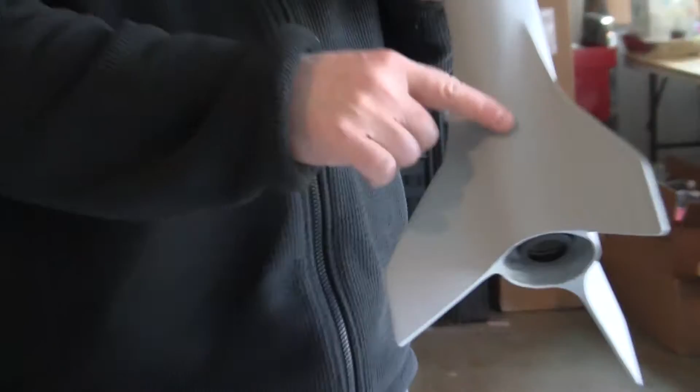a fully fiberglass kit, custom made by myself. The inside is a fiberglass tube, outside is a fiberglass tube. The only pieces that we're using from the kit is the actual plastic fins and the nose cone. But in the case of the plastic fins, we've done a full fiberglass tip to tip with heavy epoxy, and you can see there's no seams, and you can see how the ends are rounded.

But I'll use this rocket to demonstrate some other modifications we're going to make to the kit. So starting out, when you get the kit, some supplies that I recommend to make it easy.

First of all, the adhesive that you're going to use on the kit. For everything on the kit, with the exception of the engine retention ring, you need to use a 5-minute up to 30-minute epoxy. I recommend 5 minutes because most everything, once you set it up, you want it to dry pretty quick. This is Loctite epoxy. You need to use an epoxy that has a hardener and a resin, because the strength of those epoxies are what you need for the kind of stresses the rocket goes through. Loctite can be found in Lowe's and other stores, but if you have any other name brand that you like, preferably 5-minute, make sure it's a mixable epoxy.

As far as the engine retention ring, we use JB Weld because it's at the point of the nozzle in the engine, so it does get hot. So we use JB Weld to make that attachment there. Another thing, I use wood filler glue from Elmer's. It's kind of a pasty appearance. I use this to fill in any cracks or any gaps during the painting process, and also the pre-assembly, which I'll explain shortly. Works very well, dries pretty quick, and you can sand it.

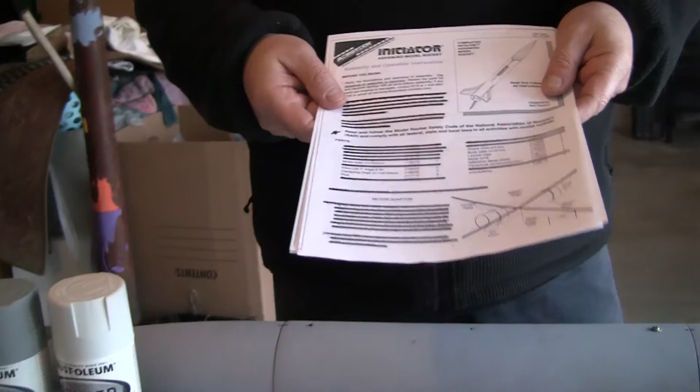So there are some pieces to the kit that you want to eliminate. When you open up the kit, you're going to have this mesh, and there's a plastic baffle that's listed up here in the parts list.

I've tried to use that before, but it tends to absorb too much of the ejection charge, and a couple of times the parachute doesn't come out. So you eliminate this and the plastic baffle.

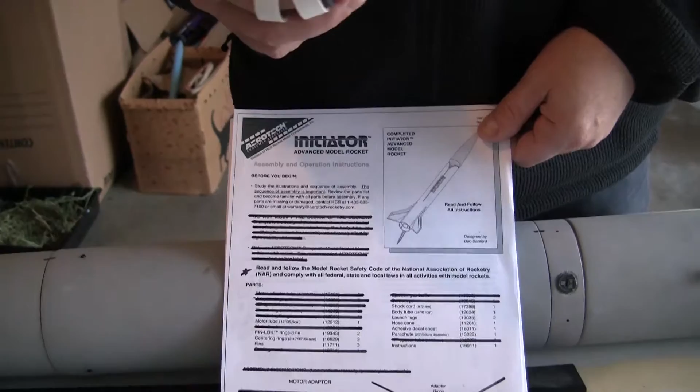We're also going to make this engine tube accept a CTI engine. All the first steps talk about putting things inside the motor tube to adapt to AeroTech's engines, but we don't want any of those, so a lot of the first instructions have been deleted. Those parts you just won't use, and the main one is the engine hook, which is explained throughout the instructions. We've deleted that.

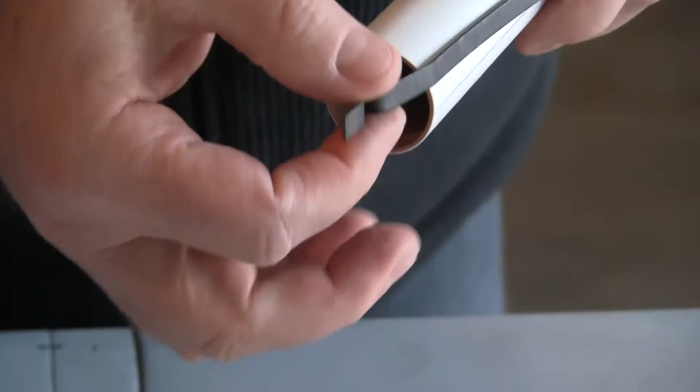In the kit you have your engine tube, and per the instructions it goes here and clips the end of the engine, but the kind of engines we're using don't need this, so we're going to get rid of it and use the AeroPack instead. This one's actually too big, but it's the only one I had. The AeroPack glues onto the end of the tube and holds the engine in, replacing this pin here.

The other thing you'll get in your package is what we call the parachute protector. It's basically a fire retardant material, and we're going to put that on the parachute where it connects to the ejection cord. This will substitute for wadding and protect your parachute, and I'll show in a later video how to put that on.

The other unique pieces are the CTI engine casing. This is a 3-grain engine casing, so all your engines will go into this, and it can hold up to 3 grains. This is the retention ring at the back, and you'll get this in the kit.

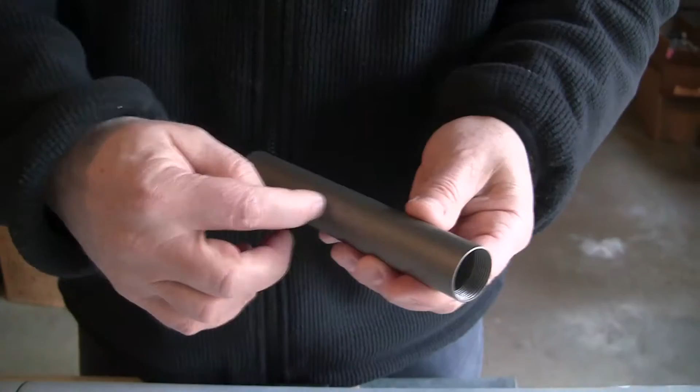You have 2 spacers. If you're running a 3-grain, you wouldn't use any spacers. If you're running a 2-grain, you'd put 1 spacer in. If you're running a single grain, you'd put both in. The idea is you want the engine to butt up to a hard surface when you put it in, then you'd screw this on. I'll go into more detail on an engine load later.

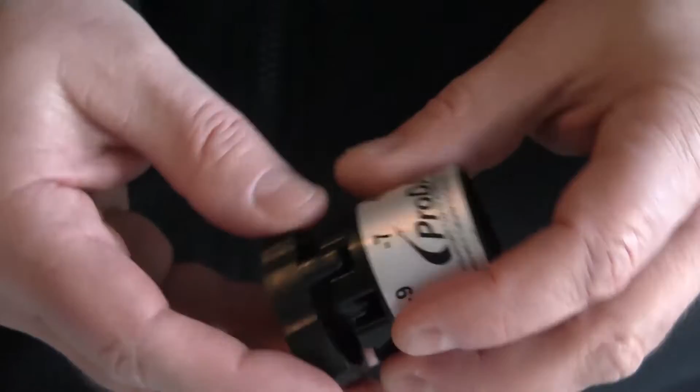What comes with the kit is the ejection delay that you use to drill out part of the delay burn — this determines how many seconds you're reducing from the ejection. I'll definitely go over that.

This is an engine casing with the igniter taped to the outside. This is a White Thunder, the lowest, smallest CTI engine you can use on this kit and still meet the thrust to weight ratio. I'll do a demonstration while I set this up, but you'll be getting 2 of these. This will put the rocket up about 700 feet, so this will be your first engine use — I'll go into greater detail on how to do that.

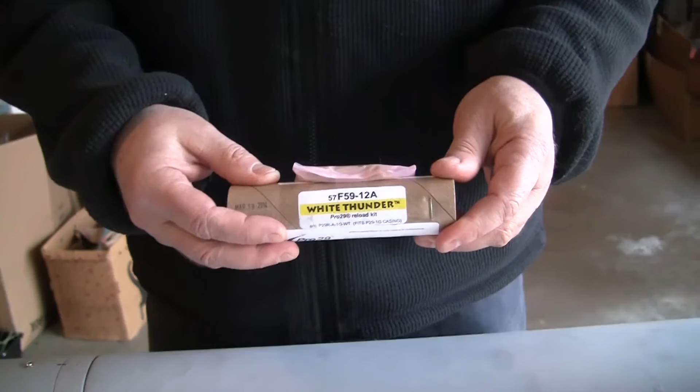Okay, so now I'll go over details on the actual construction of the rocket.

Before we start construction, it's a good idea to keep the box. The box has some perforated areas on the back, and the idea is that when you assemble it, it serves as a kind of test stand where you can sit the rocket on and do maintenance or load engines. It's nice to have this out in the field set up so it could act as a rocket mount — even some smaller rockets can sit on this, so it's a good thing to have in the field to hold it up.

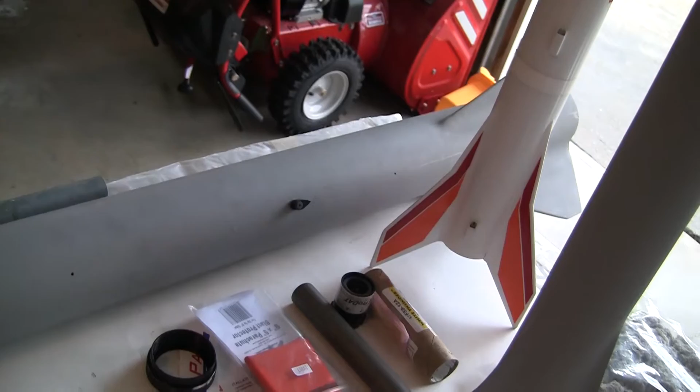Step one in my process, which isn't highlighted in the instructions: when you open it up, you'll have the outside exterior tube, the engine tube, the fins, and the nose cone section. Take all four sets of pieces and, with 60 to 80 grit sandpaper, sand everything. With the tubes, you want to get rid of the glossy feel and just rough it up so the adhesive sticks better. Same with the fins and nose cone — rough it up so the primer, paint, and glue stick well. So that's step one: take everything out and sand it.

Step two: take just the engine body tube and get some wood filler. Put the wood filler paste in a paper cup, add water to the amount in the cup, and you may need to add more paste — keep adding paste and water until you get almost a mayonnaise to ketchup viscosity. You want it more liquid than how it comes in the can currently. Let's see if I can get this open.

So you can see here it's kind of more of a paste, but you want to get it where ultimately you could brush it on with a brush. If you've got an old smaller brush, this is water soluble, so it comes out of the brush pretty well. The idea is on these seams, you want to brush over a pretty big area.

I brush on almost a half inch all the way around this tube on the seam. The idea is you want to get the wood filler into this crack. In this case, this tube is actually pretty good, the crack is not that bad. Some of them I've seen the crack can be almost up to 1/8 of an inch, but the idea is you want to brush on a fair amount. It should be a noticeable bump of putty on there as you brush it on and go all the way around.

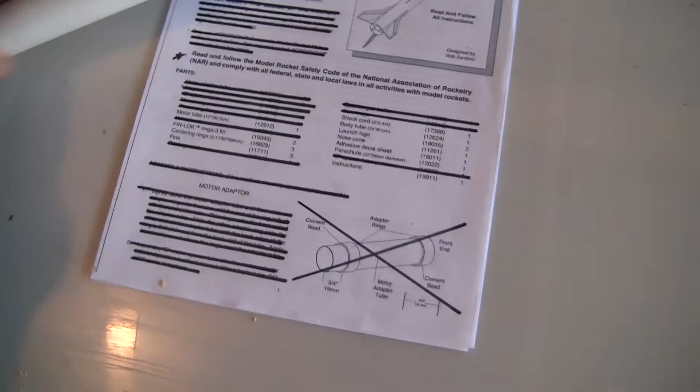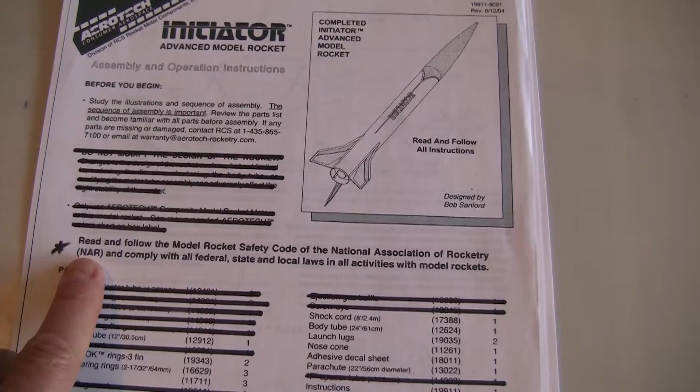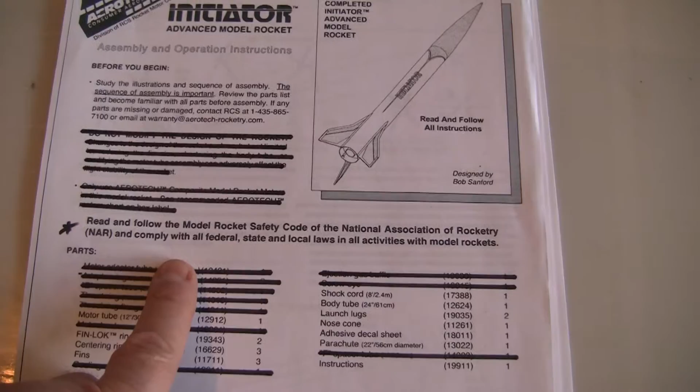So starting with the instructions, basically I've marked out all that doesn't apply. I do highly recommend this - the National Association of Rocketry is what I'm a member of. It's a great website, I would read that, although you don't have to be level 1 certified. You will be shooting engines that are well within the limit of what's considered NAR restriction for anything over level 1. But the precautions and procedures they use I highly recommend for the safety of people who are around you shooting it. So pull that up and read that if you would, please.

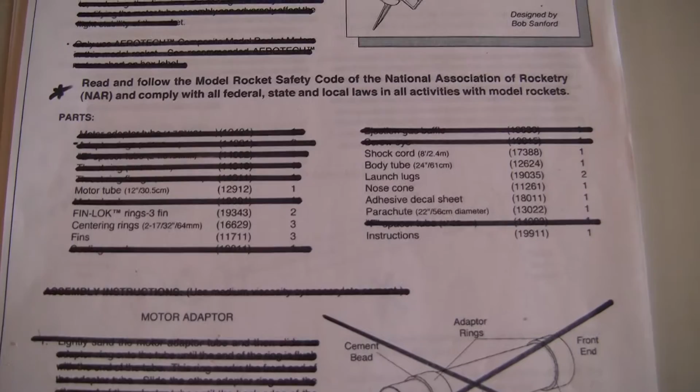So the parts - I've marked out most of all the components that are basically to go inside the engine tube that we're not going to use, and some of the hardware that we don't use on this kit.

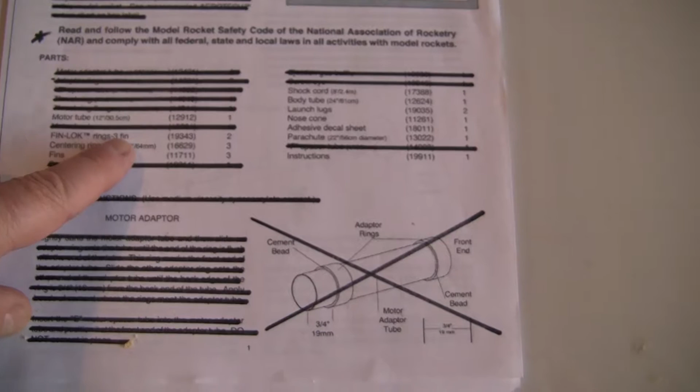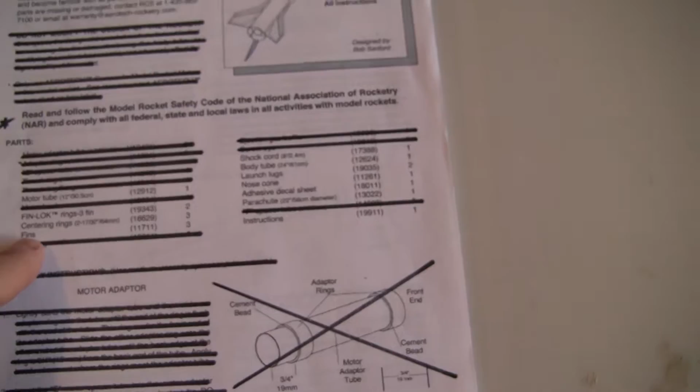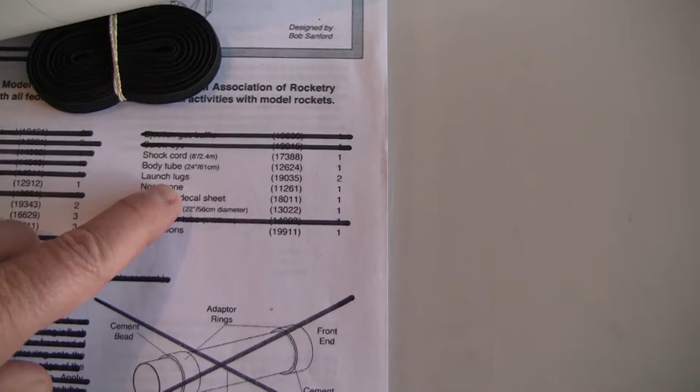Really the main pieces from the kit that you're going to use is the motor tube, that's here, the FIN-LOK rings - two FIN-LOK rings, the plastic pieces, you'll see those. You'll have three centering rings, the fins obviously, the shock cord we'll use, the body tube which I've already discussed, the launch lugs, the nose cone, the decal sheet, and the parachute.

Now the launch lugs - my original kit had these on it, you can see them. So once you glue them on and paint them, they kind of go around. That holds a 1/4 inch rod. So yes, you will use the launch lug, and please note the tapered end goes facing upwards towards the nose cone.

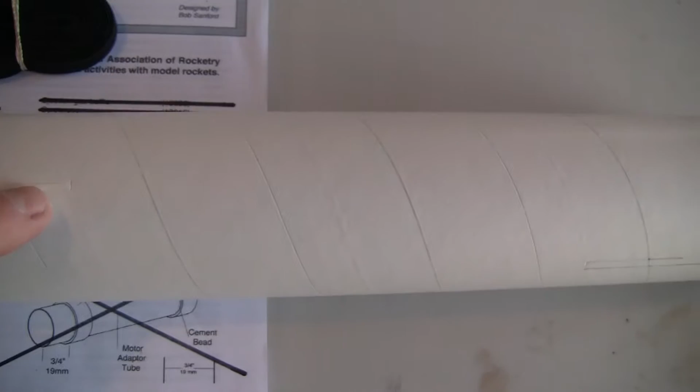The body tube is already perforated or punched out where these go. So when you take this out for the fins, you might go ahead and punch these out as well. There's one here and there's one here on the body tube, so I would go ahead and punch those out, also file and clean those up, and do that before you do the putty. That way you won't get the putty anywhere near that. So sorry about missing that step.

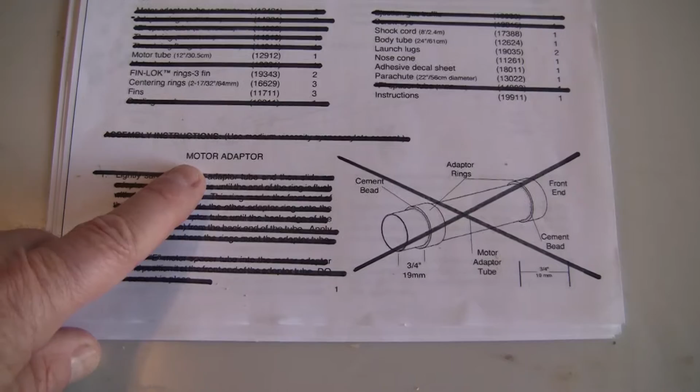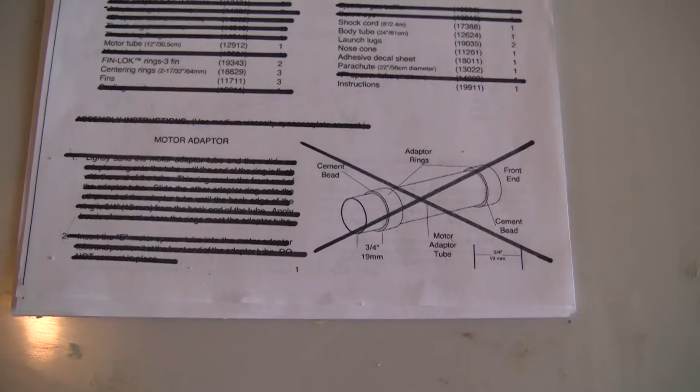So let's start the assembly process. The motor adapter section on the first page we're not doing - that's for other manufacturer engines and engines that don't use the CTI engine casing. So you'll have an actual cardboard tube in the kit with 2 smaller rings. We're not using any of that, so disregard that.

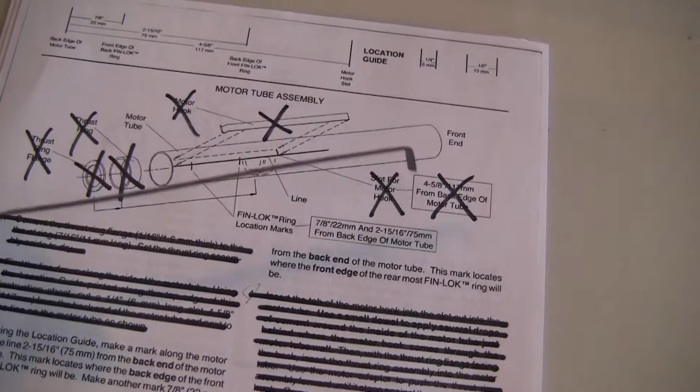Moving on to page 2, again the initial assemblies talk about putting the engine hook, which we're not going to do. So I have marked out all the pieces that we're not doing.

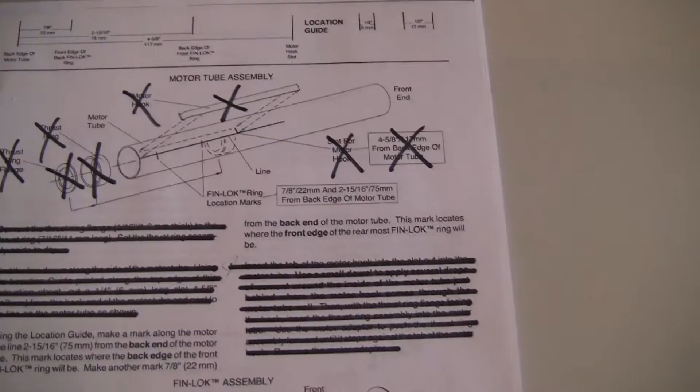Basically, do not attach the engine hook to this engine tube, nor put anything inside the tube. We want the tube completely clear of any obstructions. If you follow the directions, they'll have you gluing a donut ring inside, and if you glue that in, you cannot put the CTI engine in.

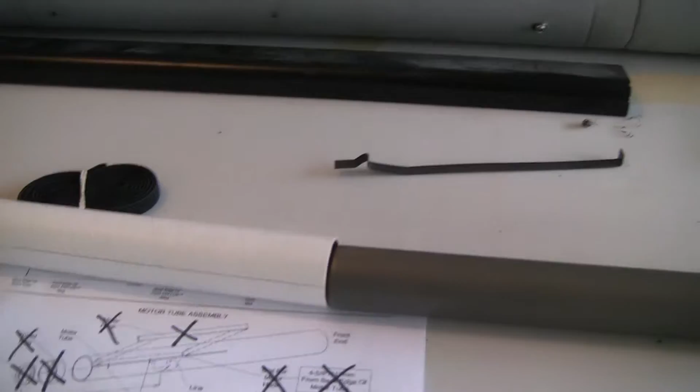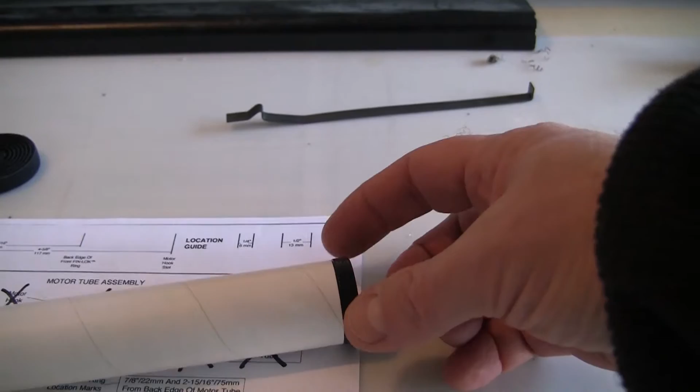So what I have here is the engine, the motor tube, and this is the CTI casing, and you can see how the flange here is bigger. That's what holds it in. That's why we don't need to glue all these pieces in per the kit, because you push this in, assuming this is in the rocket, you can see that bottoms out. This flange hits the end of the motor, and that's the connection point that basically takes the thrust from the engine casing into the rocket itself.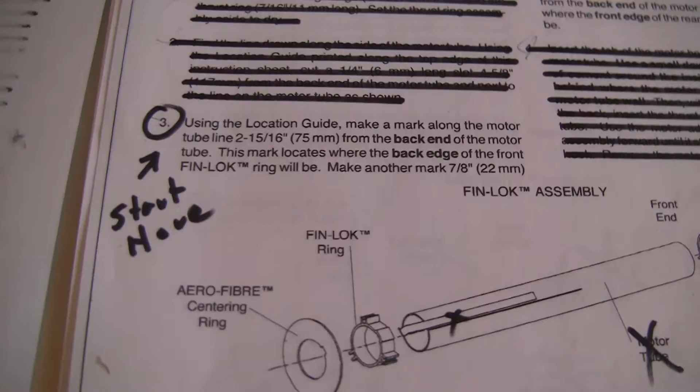So assuming you've done the sanding and you've done the putty on the body tube, the first step from the instructions that you begin to follow is under the section motor tube assembly on page 2, and you start with number 3, and I actually put an arrow.

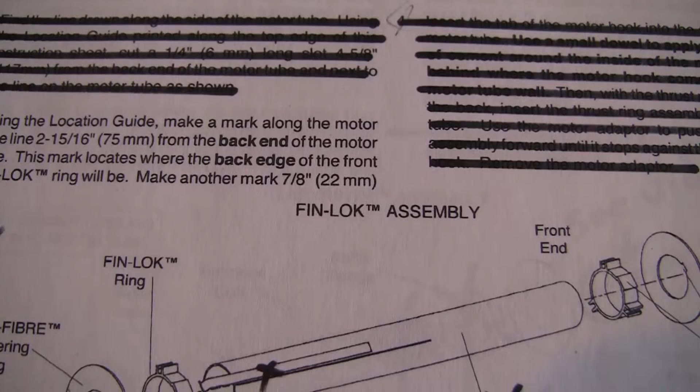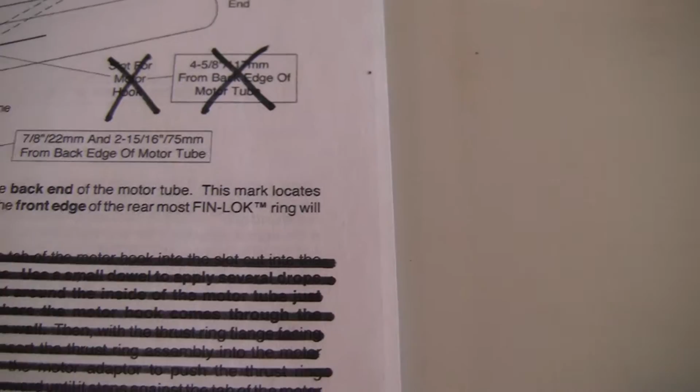Basically what it's saying is use the location guide, make a mark along the motor tube line at 2 15/16 from the back end of the motor tube. This mark locates where the back edge of the front FIN-LOK ring will be. Make another mark 7/8 inch from the back end of the motor tube. This mark locates where the front edge of the rearmost FIN-LOK will go. So making these marks is important, so I'll show you how to do that.

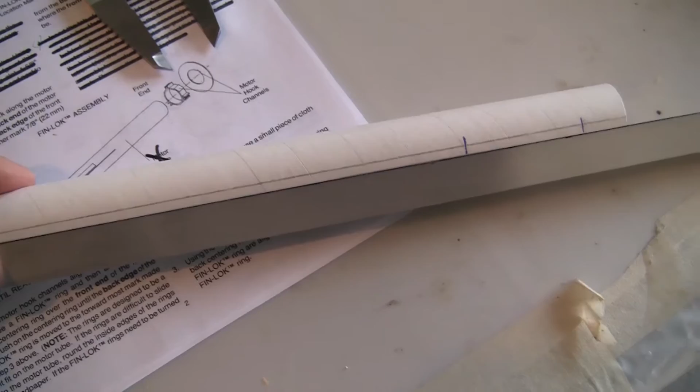Okay, when you get the tube for step 3, if there's not a line already on there, what I do is I use like a corner channel or something, like on this aluminum stock I've got here. It's a right angle aluminum stock, and basically I put the motor tube in there, and then I just draw a line down the length of the motor tube.

So I have my line here, and then you can either use the guide that they're talking about up here. You can line up the back end of the tube here on the guide, and you can make your marks. I would caution, because my prints have been scanned, so the scale is not quite right.

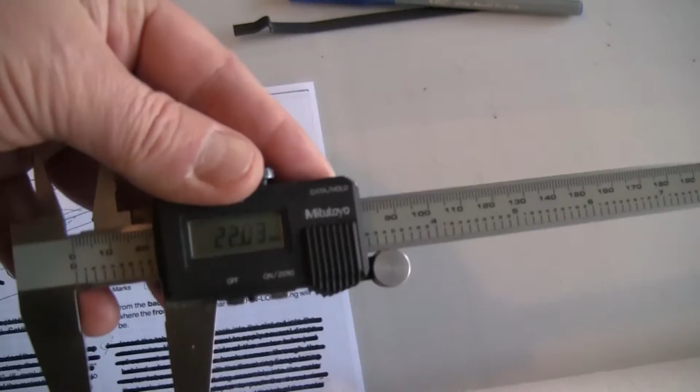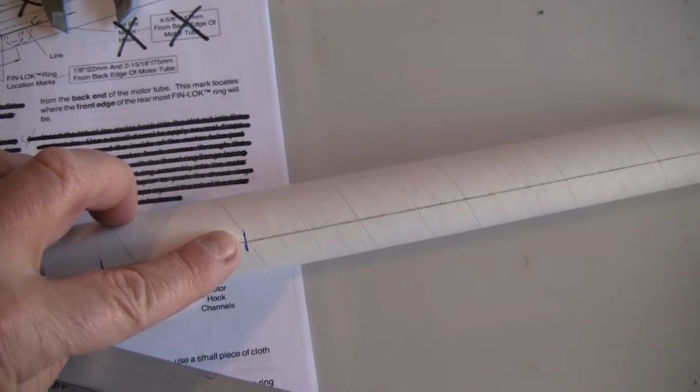But I use a pair of calipers, doesn't matter. Case in point, the first one is 22 millimeters from the back end, which I made the mark, and then you make another mark at 75 millimeters, or 2 inches and 15/16. So that's step 3.

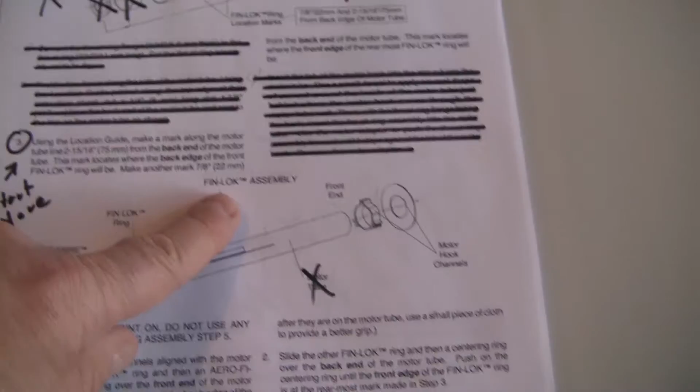Then we go to step 1 under the FIN-LOK assembly, and it's key here, as I say, for the next steps all the way to step 5, do not use any adhesive. So this is all just pressure fitted. You want to get everything fitted and aligned before you start adding adhesive.

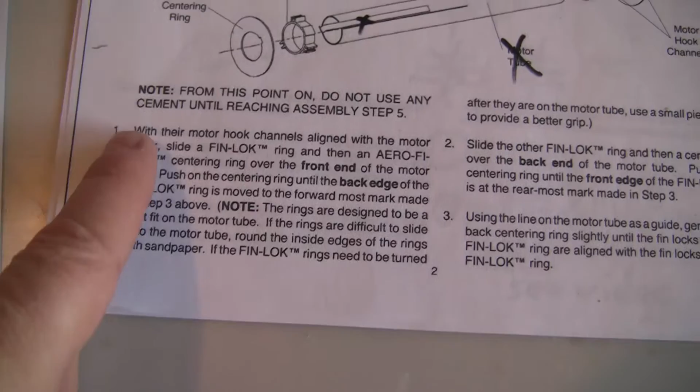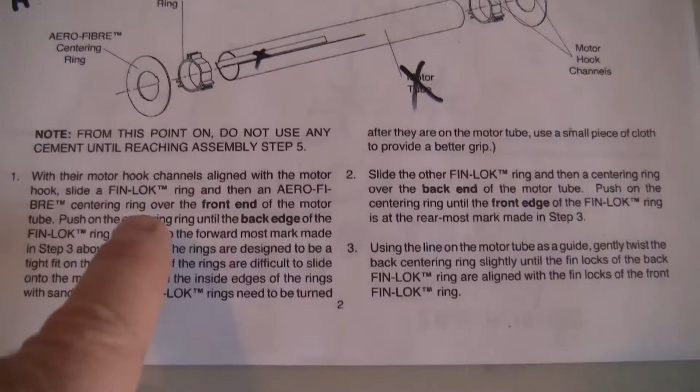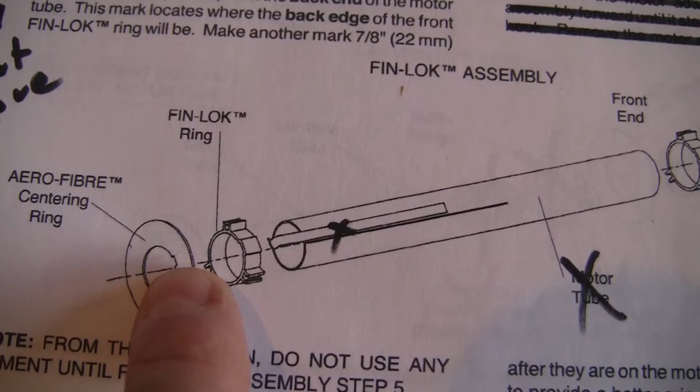So that's critical. First of all, step 1, with their motor hook channels aligned with the motor hook - in our case, we're not putting the hook on, so when they say the motor hook channel, I would just align that channel with the line that you drew on the tube. You'll notice the centering rings have a little cutout for the engine hook if you had it. The fin locks have a channel here, here, and here. Just make sure all of those line up with the line - one side lines up with the line you put on the tube.

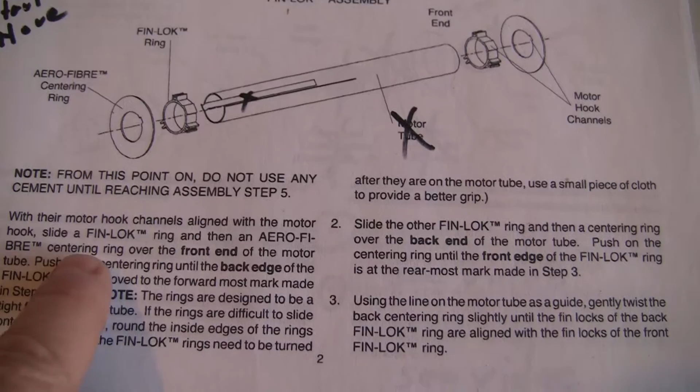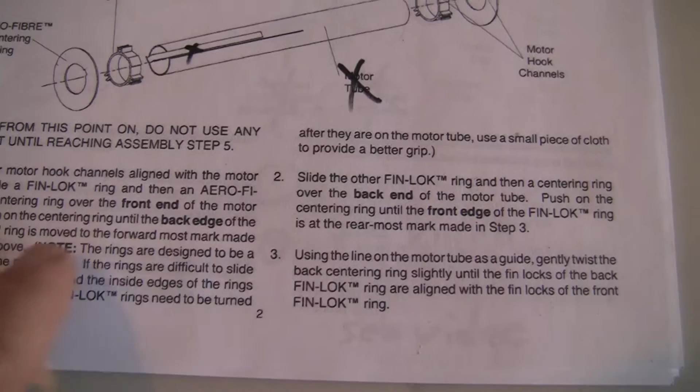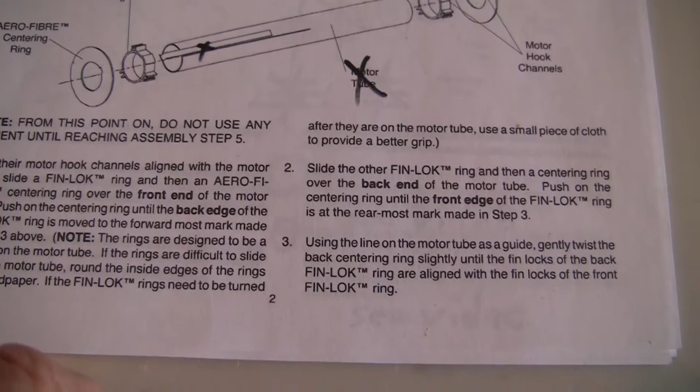So again, it says with their motor hook channels aligned with the motor hook, slide a FIN-LOK ring and then an AERO-FIBRE centering ring over the front end of the motor tube. Push on the centering until the back edge of the FIN-LOK ring is moved to the forwardmost mark made in step 3 above. Note, the rings are designed to be a tight fit on the motor tube. If the rings are difficult to slide onto the motor tube, round the inside edges of the rings with sandpaper. If the fin lock rings need to be turned after they are on the motor tube, use a small piece of cloth to provide a better grip.

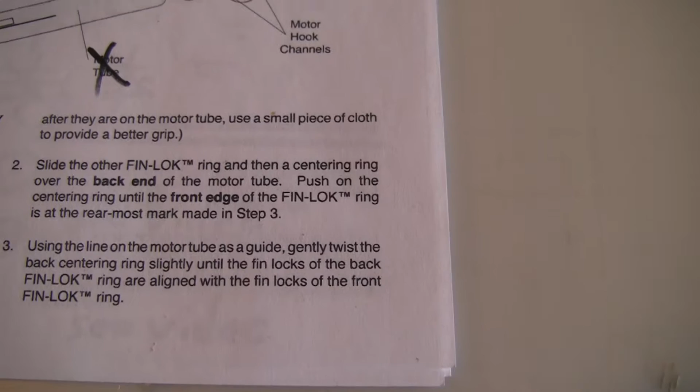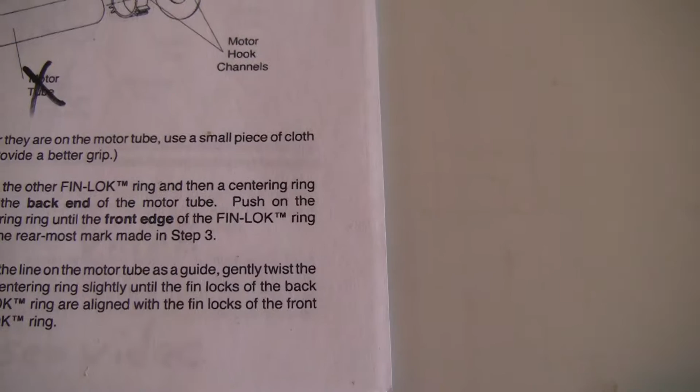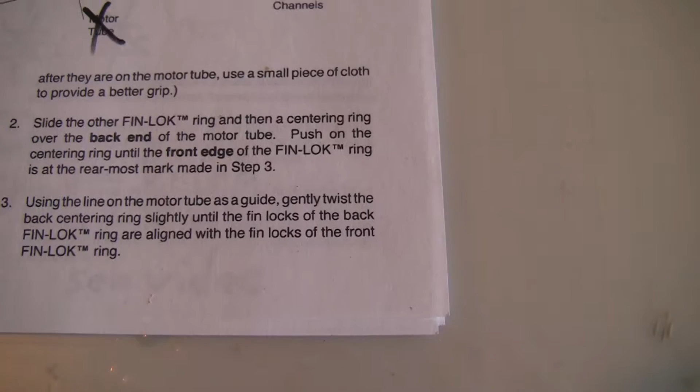Step 2, slide the other FIN-LOK ring and a centering ring over the back end of the motor tube. Push on the centering ring until the front edge is at the rearmost mark made in step 3. Using the line on the motor tube as a guide, gently twist the back centering ring slightly until the fin locks of the back fin lock ring are aligned with the fin locks of the front fin lock ring. So you end up with this configuration here.

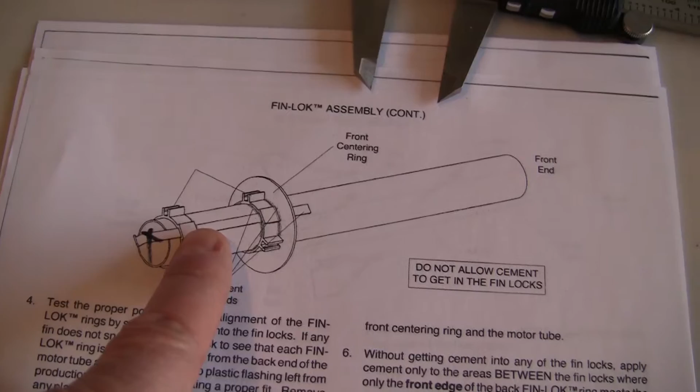You should see this fin lock lined up with the mark you made at 22 millimeters, and this fin lock lined up with the line you made at 75. You basically have the centering ring pushed flush up against the fin lock.

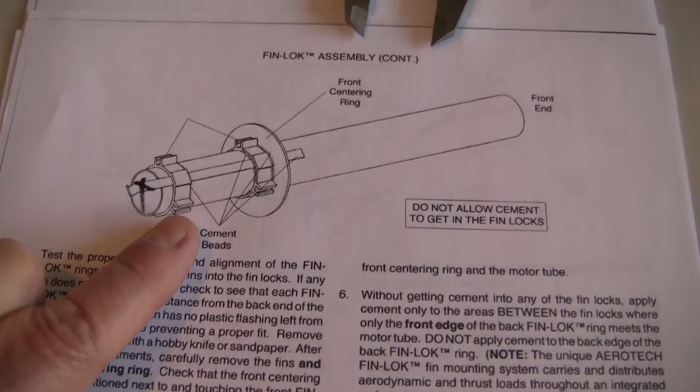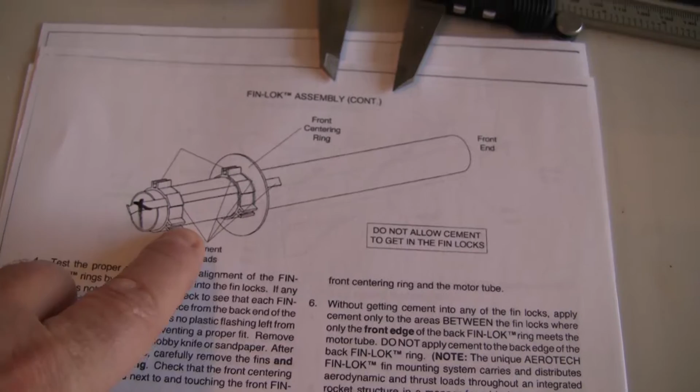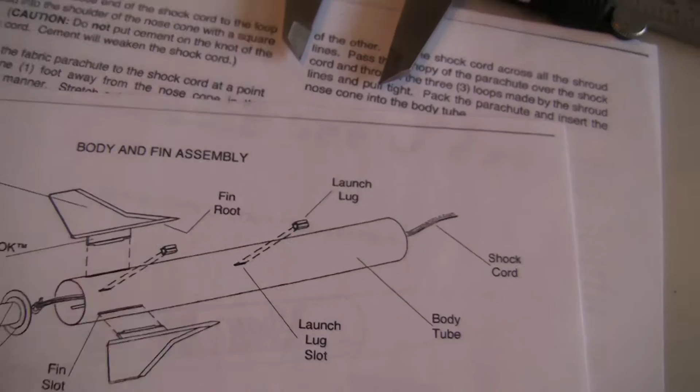Now, to know that your locks are done properly, in this next section they have you snap in the fins. Basically, the fins should line up with these snap points, and the outside distance from both these rings should match the length of the fin lock itself. So this piece right here of the fin, that distance should equal the spacing of these two fin locks.

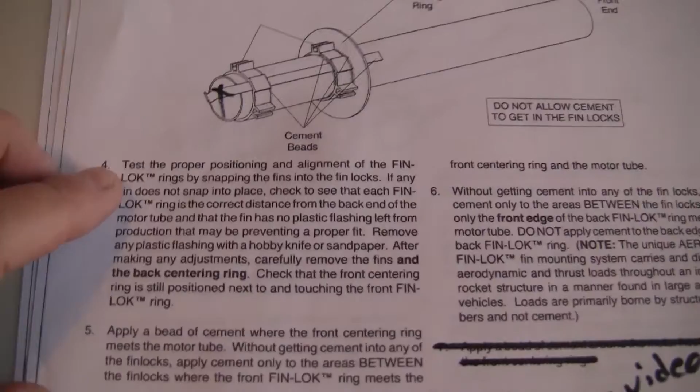Obviously, you want them twisted so they align. That's basically what they're doing in step 4 — making sure everything is aligned before you start gluing these in place. So what it says here, this is page 3, under fin lock assembly continued.

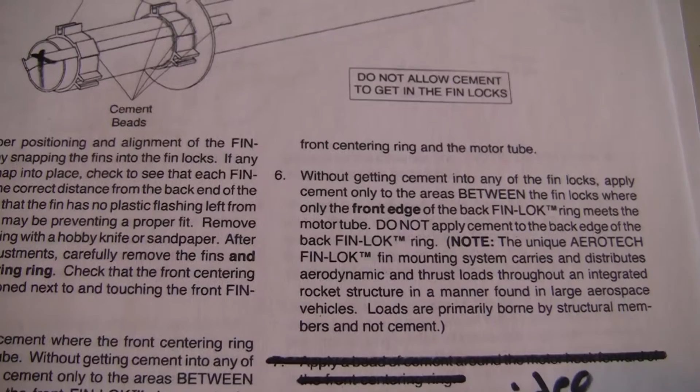Test the proper positioning alignment of the fin lock rings by snapping the fins into the locks. If any fin does not snap into place, check that each fin lock ring is the correct distance from the back end of the motor tube, and that the fin has no plastic flashing left over from production that may be preventing a proper fit. Remove any plastic flashing with a hobby knife or sandpaper.

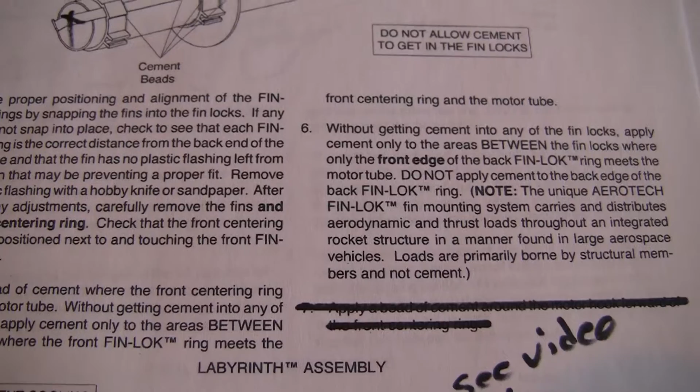After making any adjustments, carefully remove the fins and the back centering ring. Check that the front centering ring is still positioned next to and touching the front FIN-LOK.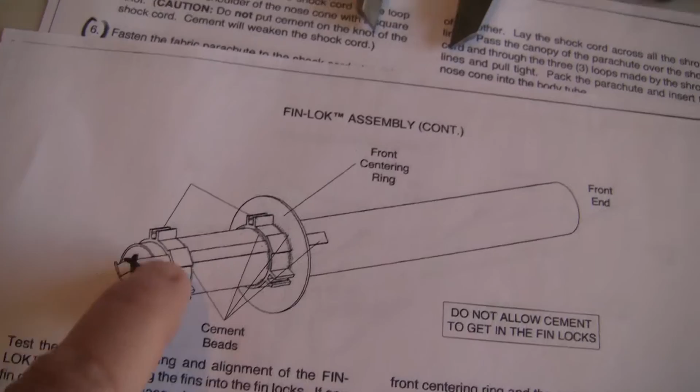So when you do a test fit, you have the back centering ring in place. The idea is when you snap the fins in, that tab should be snug between the two centering rings — one centering ring here, one here. Once that's all fit and everything's snug, take the rear centering ring off.

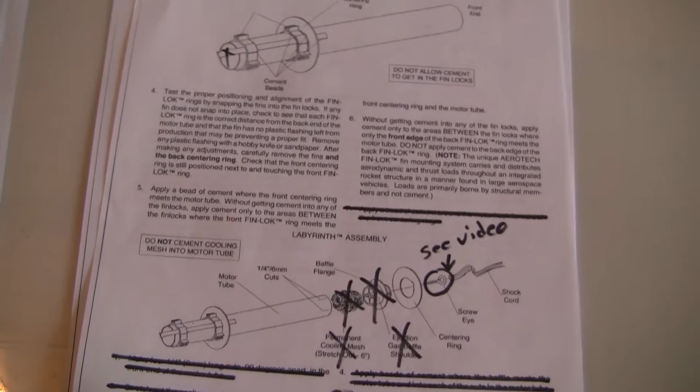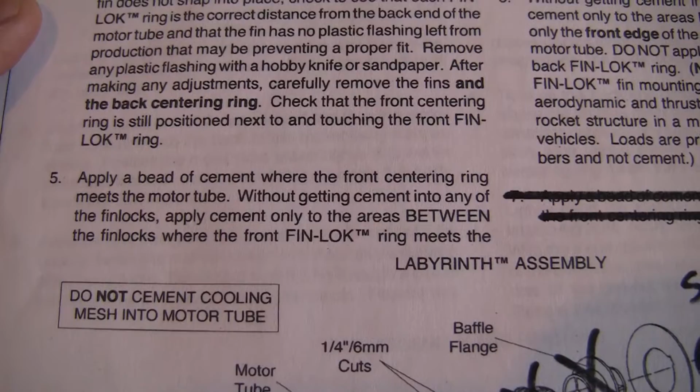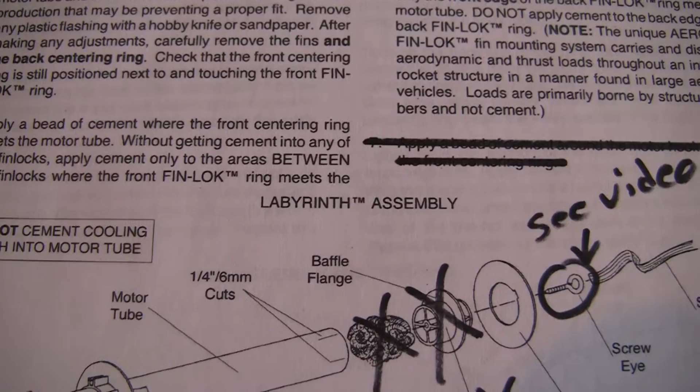We don't want to put that one on yet, because we're going to use that access point to put adhesive on the body tube. So step 5 is where you start gluing. You apply a bead of cement where the front centering ring meets the motor tube. Without getting cement in any of the fin locks, apply cement only to the areas between the fin locks where the front fin lock ring meets the front centering ring and the motor tube.

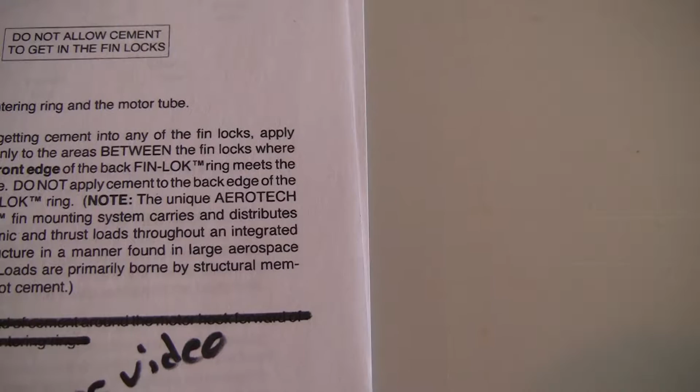Step 6. Without getting cement into any of the fin locks, apply cement only to the areas between the fin locks where the front edge of the back fin lock ring meets the motor tube. Do not apply cement to the back edge of the fin lock.

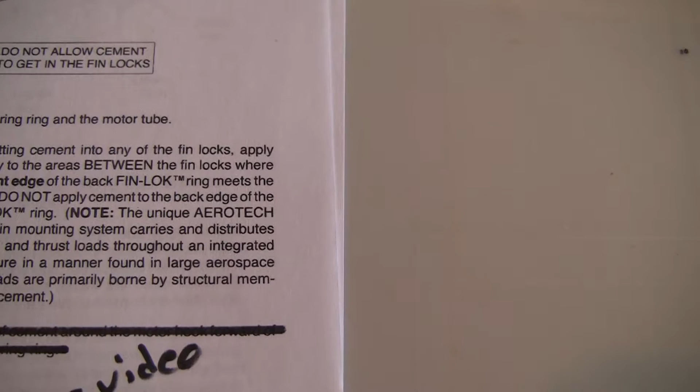Note: the unique AeroTech fin lock fin mounting system carries and distributes aerodynamic and thrust loads throughout an integrated rocket structure in a manner found in large aerospace vehicles. Loads are primarily borne by structural members and not cement.

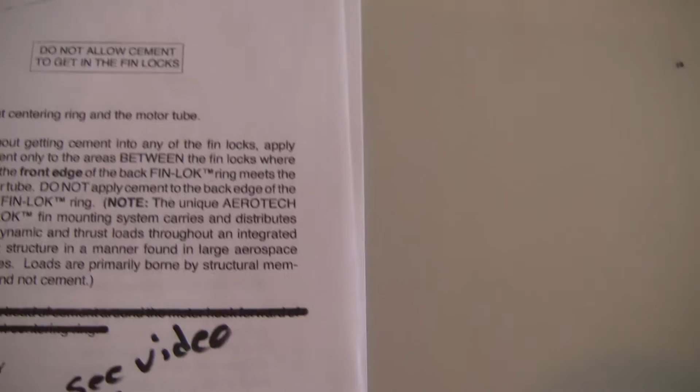So, all that said, let me see if I can point this out. You basically want to put cement all in here, and you can put a lot because this is not going to be visible — this seam and this seam. Just don't put anything where the locks are. So you want to go 3 points around.

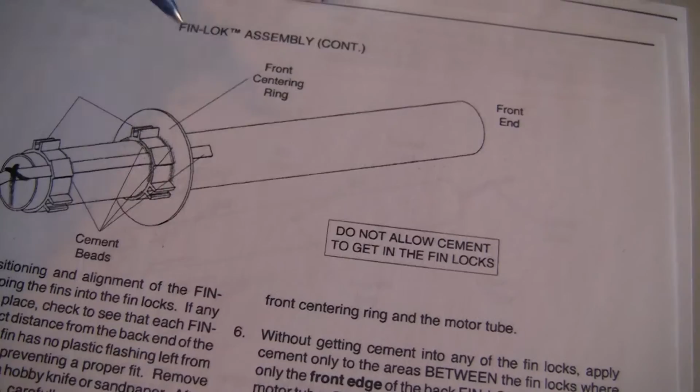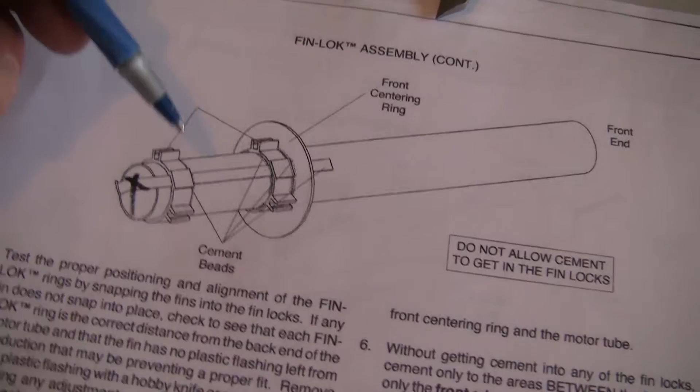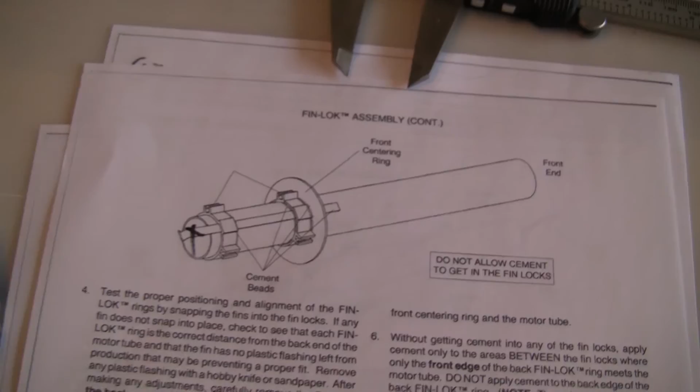On the other side, you want to put a lot of cement from where the centering ring touches the motor tube, going all the way around. On this side, you only want to put cement on this side of the lower ring, because we haven't put the centering ring on yet, and you don't want adhesive in that area until you're ready to put the ring on. But put plenty of cement here on this side. So 3 surfaces you're putting cement, and you can put a lot on there. Use the epoxy for that.

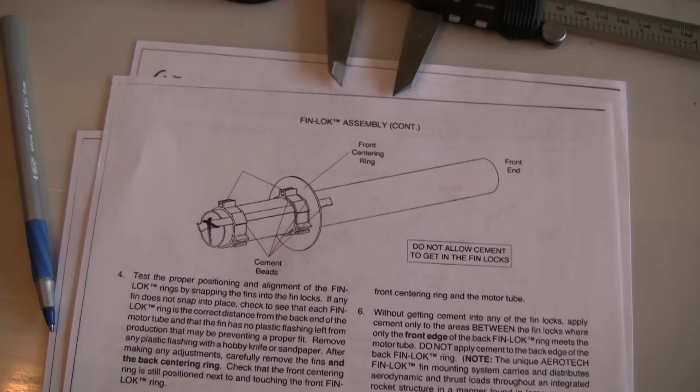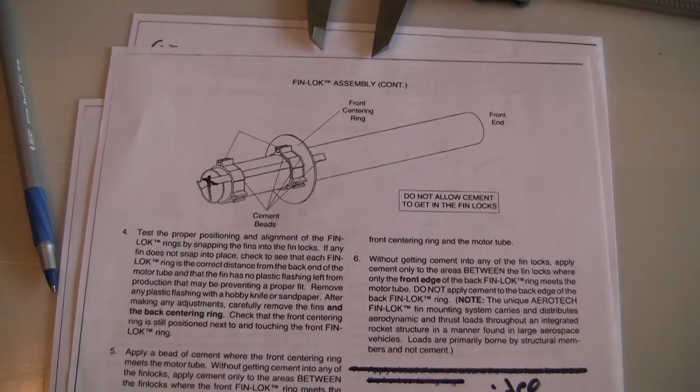Once that's done, you're basically putting this part aside for a full 24 hours to let it dry. So at this point, you're taking a break. You've got the body tube with the putty on it drying, and you've got this assembly — it should look just like this without the motor hook. This is drying, and even though it's shown after 5 minutes, I'd let it dry at least 12 hours before you start handling it anymore. So that concludes the first day of assembly.